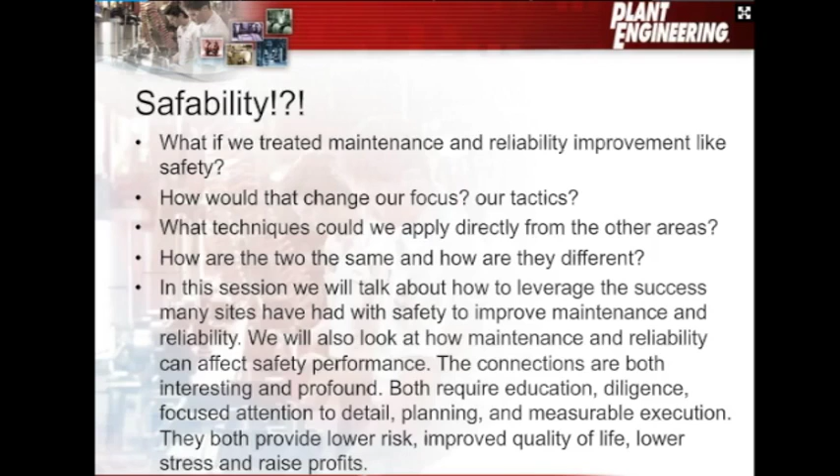So Safeability, the made-up word that we came up with, at its core, what we were talking about here was risk identification, risk reduction, risk elimination, the act of education, communication, continuous focus, the fact that you need a process or a system, and you've got to have that focus on continuous improvement with measures. And if you think about safety, every single one of these would apply.

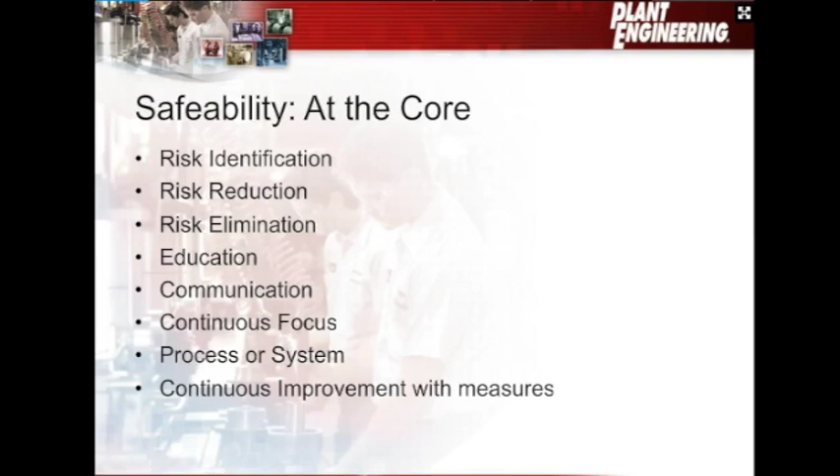We're out there actively looking to identify risk. We're looking to reduce or eliminate that risk. We do some of that through education and communication, but definitely through that continued focus. And I can do that same exercise and go back through with reliability. Again, reliability is about reducing risk. It's about eliminating those reoccurring failures. Again, a lot of that is education and communication. So that's what's at the core of the concept that we're talking about today.

So we're going to talk about, in this first part, the safety side, safety first. Here we're looking at safety improvements that were not good enough. We still have work to do in many facilities, and we're going to look at a couple safety tools.

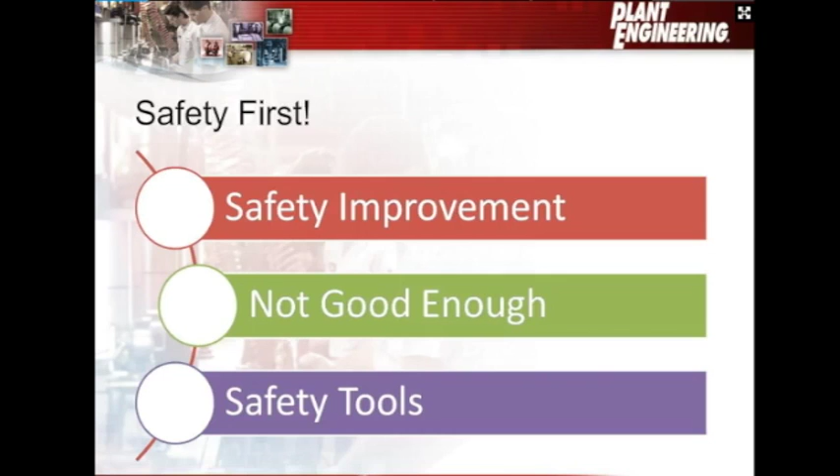So I pulled these statistics directly from OSHA just recently, so these are pretty fresh, and a couple things that I learned from that. Since 1970, workplace fatalities have been reduced by 65%. So that's a pretty big improvement over the last few years. And I think if we think about our facilities individually, many of our facilities have made great strides in the area of safety improvement. We've been able to reduce our injury rates. We've been able to make it just a better place to work from all different angles. So I think that's a very important point.

And again, you see worker deaths are also down. In fact, from 38 in 1970 to 12 a day in 2012. Now, don't get me wrong, that's not as good as it needs to be. We're going to continue to strive and push on and reduce that number going forward, but that's definitely a substantial change.

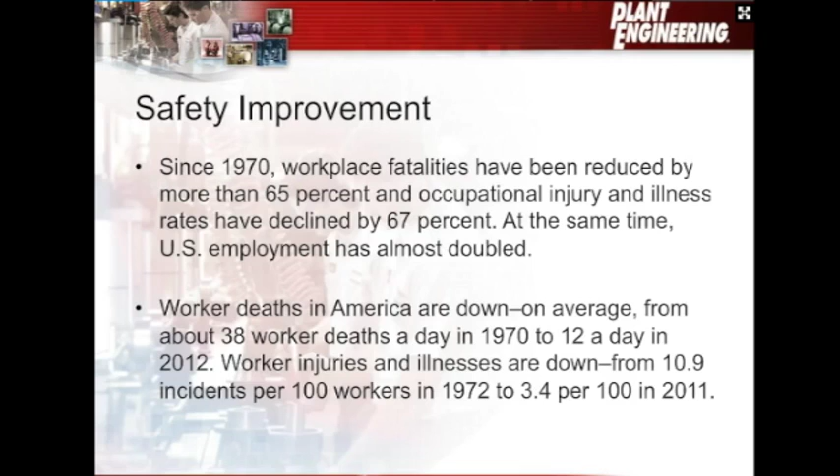So I started asking myself, well, what's different? What have we done in that safety world that we might be able to bring over and create the same culture from a reliability standpoint?

So we've got to keep it in the forefront, and I think that's a big part of what's happened in the safety environment is they have kept it in the forefront. They have toolbox meetings every morning with the maintenance craftsmen, sharing things that have happened at other facilities, talking about problems they've faced and issues they want to make sure don't reoccur. That's one of the things we've seen with safety improvement—it's always in the forefront, always something we're talking about.

So let's talk about those toolbox talks. I don't know if everybody does toolbox talks, but many facilities do, and it's just that quick discussion at the beginning of the day before everyone starts their work and distributes out across the facility. They're 5 to 15 minutes long in general, covering basic topics, and then typically at the end they'll be handing out the work orders and things and beginning their day.

About 5 minutes of that, in many of the facilities I work with, is devoted specifically to safety. They're talking about how to make sure you're wearing the proper PPE, glove selection, wearing the appropriate safety gear from an eyeglass protection standpoint or whatever the case may be. They're always making a point about all of those safety items we want to be addressing.

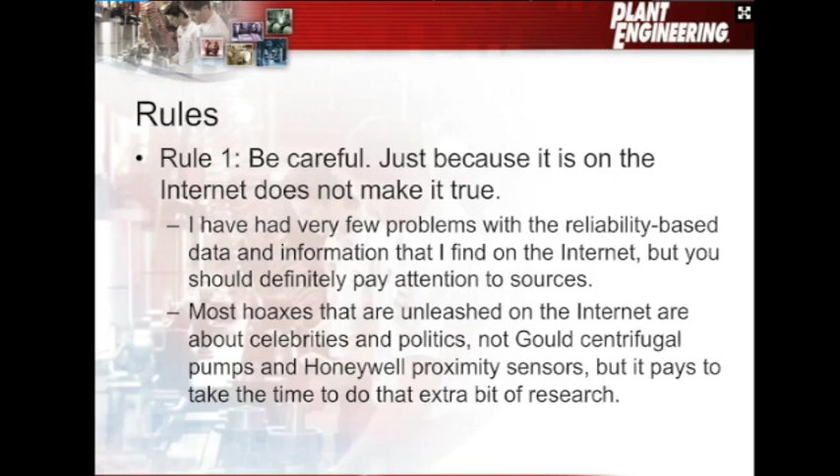A couple of rules, though. The internet can be a little sketchy, I'm sure we've all heard stories. So I like to be very careful where I pull information from to make sure it's actually true. This hasn't been a big deal in the reliability space, but there are hoaxes out there, things that maybe aren't quite best practice that some folks have put out there as such. So we want to be careful and think about that, and maybe after the reliability share, have a little discussion about it to wrap it into your culture. The second thing is the internet does change.

If you find a good source, a good website or good material, I highly recommend you pull that material down and save it on your computer to use as you see fit going forward. It's really unfortunate when you find a really good blog or good material, put it on your bookmarks, and then go back later to find the page is gone or no longer available. So I love to pull that stuff down. I have a special folder on my computer where I keep a lot of those, and I can go back and pull them quickly when someone calls and asks about a specific subject, or I want to share something with an individual.

So here's a few toolbox topics that you might use from a reliability standpoint. These are a couple that I have definitely used in the past.

You might want to spend 3, 4, maybe 5 minutes talking about how to use a bearing heater. A lot of facilities I go into really aren't big fans of precision maintenance, they haven't embraced that concept. In fact, I'd say they probably spend more time on what I call percussion maintenance - instead of using a bearing heater and sliding that bearing on, just hand me a hammer and a chisel, I'll knock it right in there.

So in this piece, I can start to introduce the concept of precision maintenance, how to use that bearing heater to better install that bearing, and what that does to the reliability of the facility. Obviously, using a bearing heater and sliding that bearing on is going to give you a lot longer life and a lot more time between failures.

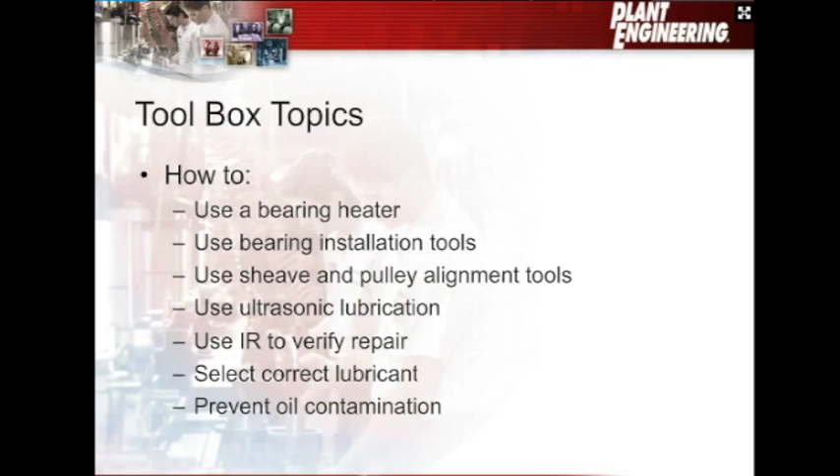If we can improve the reliability of that asset and not have to do emergent repairs, we've also improved the safety. And again, that's that connection back and forth. Emergent repairs are very, very risky compared to a planned and scheduled job. I'll show you that in a few metrics in a few minutes.

I love single point, or one point, lessons. I don't know how many of you guys out there are using them today. I'll show you a couple of examples here in just a few minutes. But the idea for me is that I do break the rules a bit. I don't just put one lesson or one point on each of mine, but what I do is keep it to one page. In that one page, there can be concepts I want to explain, models that help people understand what I'm trying to do, and I take these out.

I've seen this from a safety standpoint. People will post safety shares on break rooms, on the walls, even on the posters in the back of the bathroom door. I've seen them everywhere, and I think we can do the same thing with reliability. If folks begin to understand how all of these things work together, and see them on a regular basis, and know that it's part of what we're doing, that new culture we're creating, then that will get us closer and closer to the Safeability we're looking for.

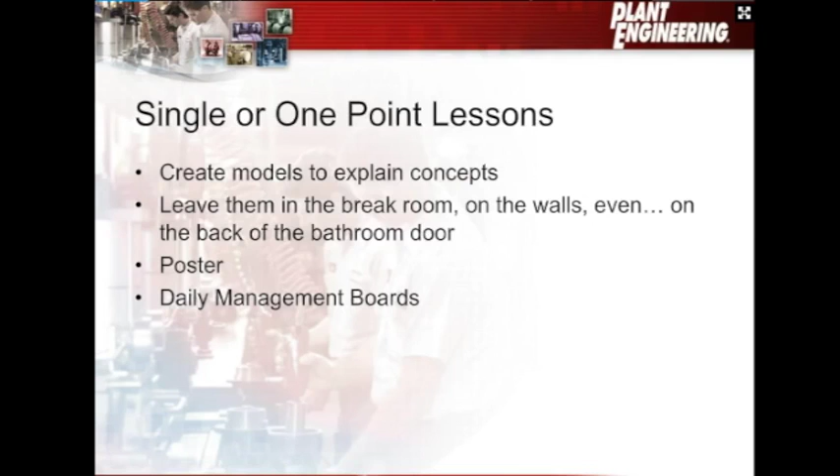So posters, daily management boards, single point lessons, all of these give us an opportunity to communicate this new idea, or this new concept, of Safeability.

So the next thing I want to look at is metrics. Metrics has been a big part of how we've been able to improve safety. Let's talk a little bit about how we might be able to do the same from a reliability standpoint. Now this is a single point lesson on performance-centered metrics.

I worked with a great team of folks to put these together, but what we were trying to do is really refine our metrics, because so many facilities today have hundreds of metrics. We have EAMs, Enterprise Asset Management Systems, and computerized maintenance management systems out there today. They're capable of generating and accepting an unbelievable amount of information that can be converted into metrics. The problem is we get very overwhelmed from a metric standpoint. So what we were hoping to do here is take a look at our metrics and really drive them

to be performance-centered metrics. You'll see we look at: what are the goals of the organization? What metrics can be used to accomplish or drive those behaviors we're looking for? How long should it be a focal point of the organization? Many facilities I go into today have been tracking the same metrics for 15 years, and in reality, in the last 5 or 7 of those years, the metric really hasn't changed. Either we've flattened out and plateaued, or they've learned exactly how to calculate that metric so they get it right every time. So what we want to do is think about, okay, we don't need this holy metric that we're going to keep forever.

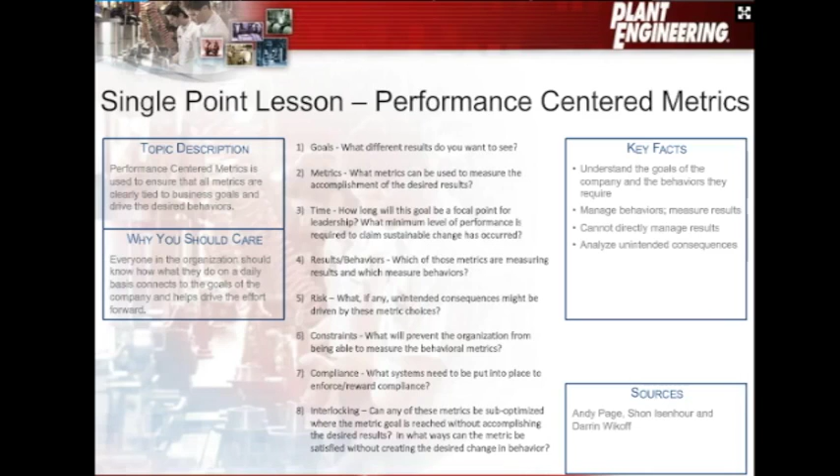So this is the idea of performance-centered metrics. There's a lot more information available there on the single point lesson that you can take a look at as you have time.

Now here's another look at that, and I have four of these single point lessons here, and now I'm talking about a metric and what it's really after - what is it really going for? Some of your metrics are going to measure things like effectiveness - that could be route compliance from a PM standpoint, from a preventive maintenance standpoint. It could be efficiency, actual versus estimated. It could be quality - emergency work or percentage plan work. All those kinds of things measure that quality aspect.

And then we have productivity - is the maintenance labor balance correct? And then there's innovation - what are we doing to get better as we go forward? And that could be things like labor and material estimates.

All right, so when you're thinking about your metrics, think about all the things we talked about in the earlier section, and then think about moving through each of these categories and driving yourself toward innovation.

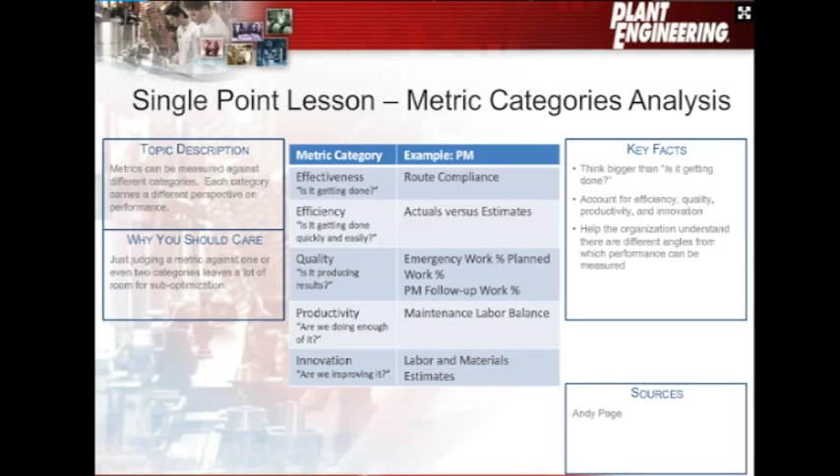The next piece that I think is very important for folks to look at is transition planning for your metrics. If you're going to pick metrics to drive organizational change, you're also going to need to know what values you need to be at and when you want to be there. So as you move in, you'll see that there is a goal that you're going after, just like we saw on the first slide. There is time.

How long should it take us to get there? There are steps along the way - what do those metric values need to be, and how big should those steps be? What can the organization really do within that time period? So there's limits, there's action plans, there's people who need to own those metrics, and there's communication that's going to have to go back and forth to help the organization even understand why we're measuring those metrics.

So these are some of the same thoughts that we've used to drive the metrics around the safety side of our organizations. Now we can take those same thoughts and really take our metrics away from just being a standard list of metrics and really focus them on the behaviors that we want to change, lock those behaviors into the new culture, and move on to the next piece that we want to measure going forward.

So the next area I want to look at is problem solving from safety. Safety - they've done a very good job of really beginning to understand the causes of many of the problems that they face. So what we want to look at is, are we doing everything we need to do on the reliability side to understand the causes that we're facing?

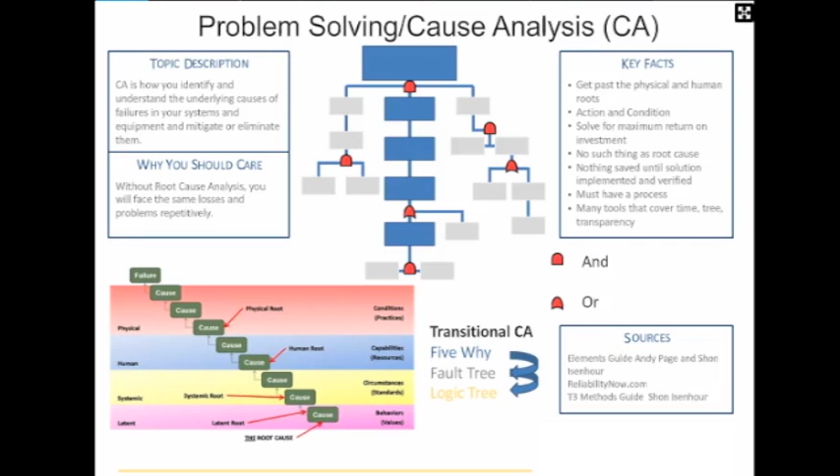So the next thing we're going to do is look at a quick video clip, about 4 or 5 minutes. It's part of one of our Sustaining Skills video series, and it's going to introduce you to this concept of branching that 5 why out transitionally into other tools, depending on how big the problem is. So I'll go ahead and have you guys start the video for me.

When we discuss RCA, we use a method called Transitional Root Cause Analysis, or TRCA for short. It is made up of 10 tools that can be explained and understood in a very short period of time. In the next few minutes, we will introduce you to 3 of the 10 and explain why we consider them transitional in nature. We will start with what we categorize as the tree methods, 3 tools that build out into an upside-down tree-like structure.

The first one is called the 5 why method. It is common in the industry today and is a basic root cause tool. It is created simply by asking the question why multiple times to create one causal chain.

If we take the 5 why diagram and branch it out by adding more elements at each level, then we get a better representation of all the causes that come together to create an effect. This transformation of the 5 why is known as a fault tree. This method allows us to easily see more of the factors that led to a failure.

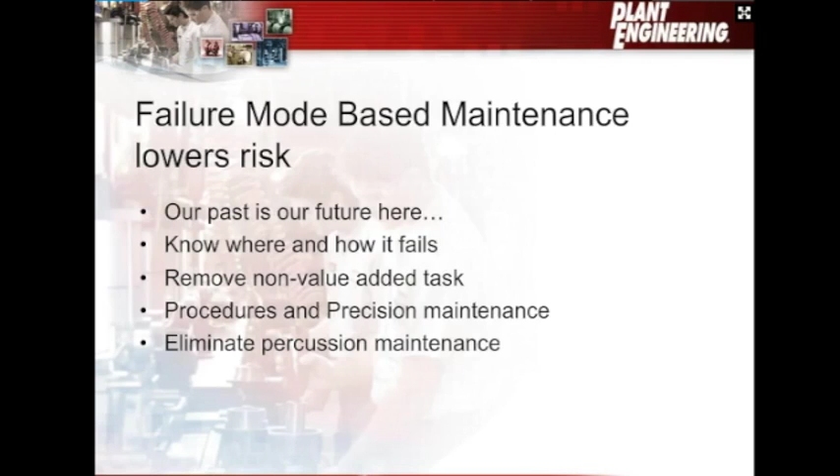We've got new risk coming into the marketplace and we need to be aware of it. One of the things many of us are facing is aging assets. Aging assets aren't nearly as safe in many cases because they haven't been guarded, built, or designed the way we might build them today. That's a problem from a safety standpoint. And from a reliability standpoint, if no one's taken care of those assets, you could be sitting on a bit of a time bomb. Because of lack of maintenance, they could have had a lot of potential failures put into that system over time, and now we're going to deal with those later.

The next risk we're facing is counterfeit parts, and we're seeing a lot more of this over the last couple of years. The University of Tennessee is building a new curriculum to teach folks about counterfeit parts and the associated risk. I'm seeing more and more of these counterfeit parts in facilities all over the world. I was in China working about a year or so ago and saw quite a bit of these counterfeit parts firsthand, and now I'm beginning to see them here in the U.S. So definitely want to keep that in mind.

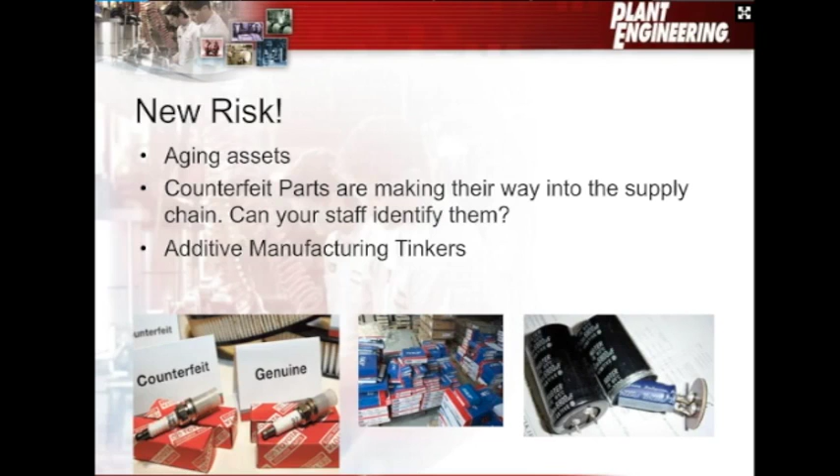The next area where I think we're going to see new risk is additive manufacturing tinkers - really kind of a subset of counterfeit, but what I'm talking about here is 3D printing. We're starting to see a lot more 3D printed items in the manufacturing area. Most folks use them for simple things like switches and buttons they want to repair or replace that have been damaged. But we've also started to see other products from the metal side getting into the process, and because they were printed with a metal 3D printing process, they aren't the same metallurgy as the original parts. So they're not able to stand up to the stresses, and we're seeing some failures associated with that. That's just another thing to be aware of - it hasn't been as big of an issue, but we've already seen 2 or 3 examples of it.

Another area that focuses on risk is the new ISO standard, ISO 55000. That standard has come to the marketplace, and it focuses on what value the assets provide and how the organization manages those assets. It focuses on the leadership and workplace culture needed to get maximum value out of those assets going forward. Asset management gives us assurance that those assets will meet their required purpose, so it's looking at all the different risks out there, and it's very much a risk-focused process. If you're thinking about ISO 55000, you're thinking about managing risk, and that's an area where you'll definitely want to use some of these tools.

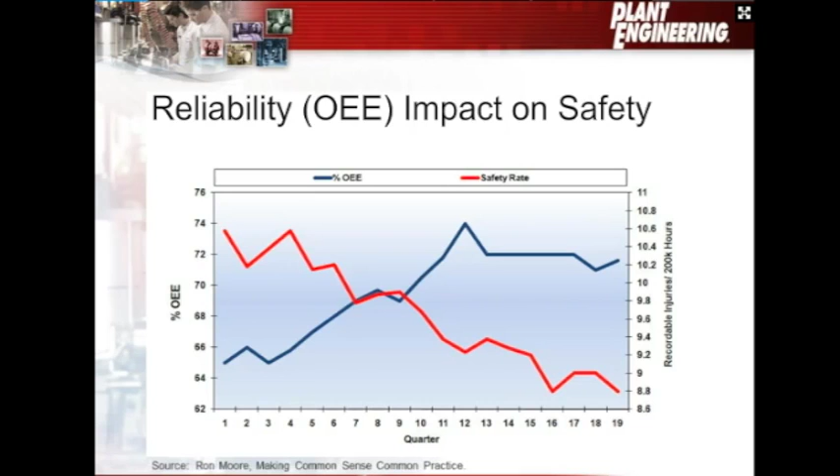So planned work is safer, there's no doubt about it. If I'm planning that job, figuring out what tools I need, what people, what parts need to be there, what risks are associated with it, when it needs to be done, I can lower that injury rate, and many facilities have seen this, because I don't have people out in the facility firefighting.

The interesting thing is if we can use predictive maintenance, now we can go in and do that same inspection, maybe even better, with less exposure, less time in the area, and without the invasiveness of having to take things apart. The example I think about: if I have a gearbox in a facility, and I'm going out on a preventive maintenance standpoint, taking that cover off, inspecting those gears, and then putting all the bolts back in and tightening it back up, that's a high-risk operation for that equipment if I have a dirty environment. All that dirt can be blowing around in the air and get right into that gearbox. I could accidentally drop a washer or a nut into that gearbox. Anything could go wrong there. So the risk is very high from that preventive maintenance task.